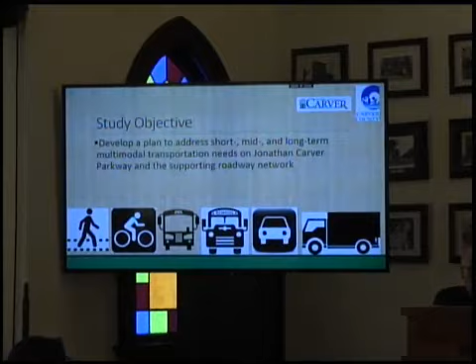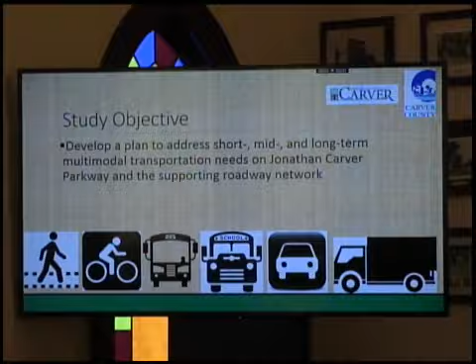As a reminder, our overall objective of the corridor study was to develop a plan that really looked at the short and long-term needs along the corridor. The idea was to look at things from a multimodal perspective. So we weren't just looking at things for the single vehicle car user, right?

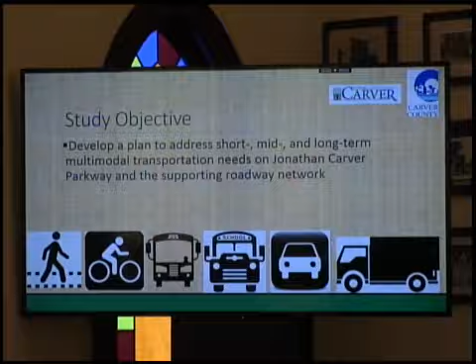There's trucks on this corridor. We have a very active gravel mining operation that's probably not going away in the next 20 years. We have a new elementary school, so we have school buses, and a lot of students walking, or being encouraged to walk and bike to school. So we have a lot of different users on the corridor, and the idea was to make sure the study took all of those users into account.

So we had developed some initial goals for the study, really to make sure that we are providing efficient and reliable travel, that we are safely accommodating all the different users, building upon the existing non-motorized transportation network. We'll get into that when we talk about the concepts, but there are some good elements in terms of pedestrian and bicycle facilities out there today, though there are some gaps, some of them by that school area, and we want to build on that and make it stronger.

We also want to provide infrastructure improvements that are compatible with the elements around the corridor, making sure we are sensitive to the different contexts along the corridor, and then do the improvements we identify in a financially responsible manner, so you're not redoing things. Let's look at the bigger picture, and if it makes sense to preserve some right-of-way today for something we need 20 years out, that's probably a better investment than waiting 20 years and impacting a building or somebody's home. So that's the framework in terms of the goals we devised.

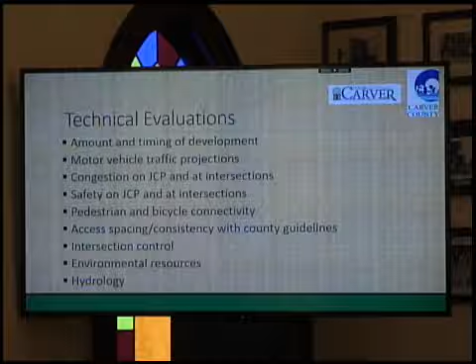So we did a number of technical evaluations. We looked at the amount and timing of development. We looked at traffic projections in terms of how many users are likely to be on the corridor. We looked at congestion on Jonathan Carver Parkway and at key intersections along the corridor. Same thing for safety—there are a couple of areas where we have some crash problems today. We want to make sure we address those and aren't causing problems for the future.

Again, that's the pedestrian and bicycle connectivity I talked about before. Looking at access on the corridor as development occurs and keeping that consistent, or making that work as best we can with some of the guidelines out there from the county, and even with MnDOT in terms of our connection to their system. Looking at different types of intersection control.

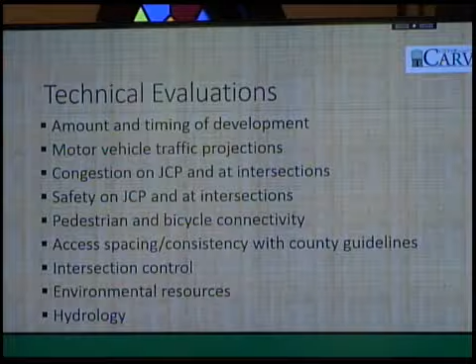So we looked at whether to keep things as side street stop, as some are today, where only the intersecting roadways have to stop. Does it make sense to consider roundabouts or traffic signals? We looked at a bunch of different options at those key intersections along the corridor.

We also identified environmental resources along the corridor in terms of wetlands and threatened and endangered species in the area, and then we looked at hydrology as well in terms of how we do drainage along the corridor.

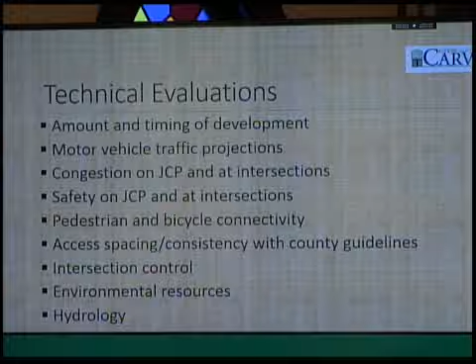This happens on a lot of roadways. Many were put in before we had current drainage rules, so you get ponding issues, or sometimes flooding issues on different corridors. So we're trying to make sure that when the county or city makes improvements, we're addressing all of those water resource needs as well.

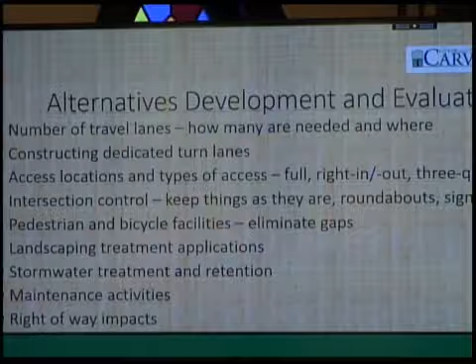So those were the base technical analyses to figure out the existing and current problems we anticipate on the corridor. Then we went through and developed a number of alternatives and evaluated those alternatives.

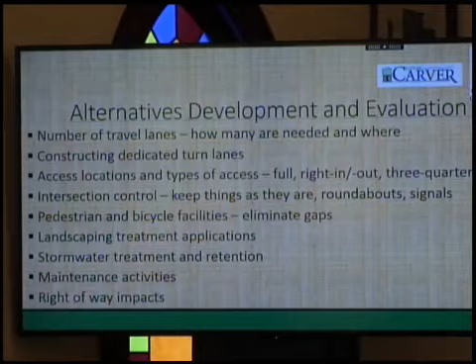We looked at how many travel lanes are needed on the corridor, and where those are needed - is it for the whole corridor, or just a portion of it?

We looked at constructing dedicated turn lanes. At some intersections you don't have a left or right turn lane approaching, and that can lead to safety problems. It can also make drivers uncomfortable when you see that car in your rearview mirror coming at you, and you want to turn left and have nowhere else to go. So those are the types of things we looked at in terms of the intersections.

We looked at some of the different types of access locations - do we keep them full, do they become right-in/right-out, or three-quarter, again for some of that safety and mobility. We also talked about roundabouts, side street stops, and traffic signals, eliminating gaps in that network.

We looked at some potential landscape treatment and applications, and we'll have information on that at the open house, along with some stormwater treatment and where we might need some potential ponding. We've also talked about some maintenance activities along the corridor.

As we get to the southern end, when you make that turn to go towards Jordan, there are some trees in that area that make seeing that intersection a little bit difficult, so potentially going out and doing some tree clearing and other activities.

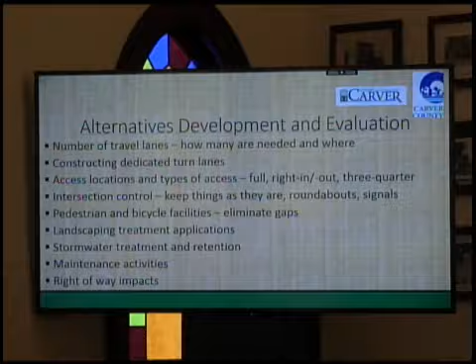And then we looked at some of the right-of-way impacts for some of the alternatives. In terms of right-of-way, it was again about preserving that long-term corridor, as well as looking at some of those intersections.

You can probably build a roundabout for any intersection, but your roundabout can get pretty big - you could get 2 or 3 lanes, and that's probably not good for most drivers, and it's going to have a pretty big impact on property. So that's when you start looking at traffic signals again.

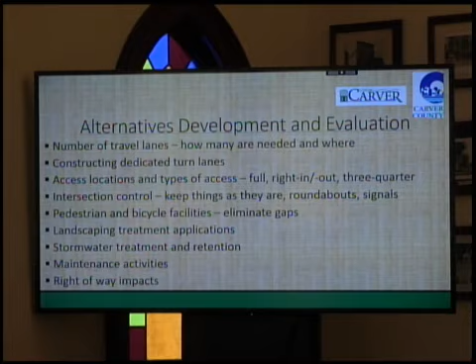So those are some of the things we went through in the process. We had gone out previously and asked folks through different engagement processes to help us identify what the problems were or things they'd like to see on the corridor in terms of improving it.

So we've had some open house meetings, we had focus group meetings, and we've had meetings with different resource agencies, like the county's watershed folks, understanding any concerns from those types of agencies. We've done a couple little newsletters.

We've got a project website. We've sat in on development review meetings. Since we've started this study, there's been a number of developments that have come forward along the corridor.

And so we've sat in with the development folks talking about where we think the corridor is going to end up, so that we're preserving the right-of-way before development happens, and we're not going back to people after the fact about where that's going to occur. And then we've given some updates to City Council, the County Board, as well as the Township Board.

So we do have some upcoming stakeholder involvement. I'm here tonight along with Dan, just giving you guys an update of where we're at. Dan's been working with the County Board making sure they're up to date on items. We're doing some website updates.

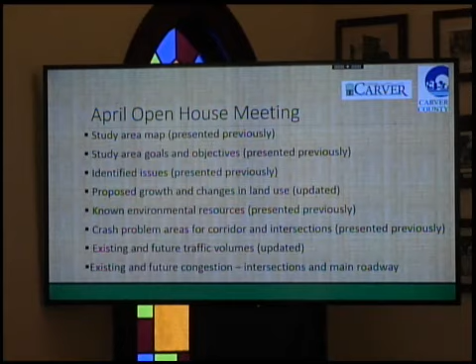We'll have updated information regarding existing and future traffic volumes. For those who have listened to my updates, you knew we were on hold while waiting for better traffic information, and we have that now. We'll also show those areas where we're going to see congestion continuing in the future.

We will have an ultimate corridor concept showing roadways, intersections, and trail improvements, plus a typical section so people can see how many travel lanes there are and where trail locations would be, giving a sense of how the corridor could look and function. We'll have a general landscaping concept that builds on the concepts done on Levi Griffin, tying in river rock ideas and low vegetation along the corridor. Then, costs, implementation phasing, and next steps of the process.

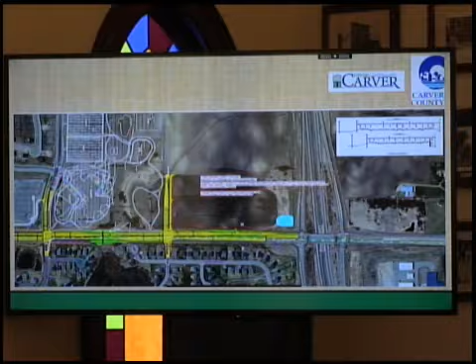So I'm going to walk through where we are at the northern end of the corridor, and I think you have the concepts in front of you. Just trying to think of the best way to go through this.

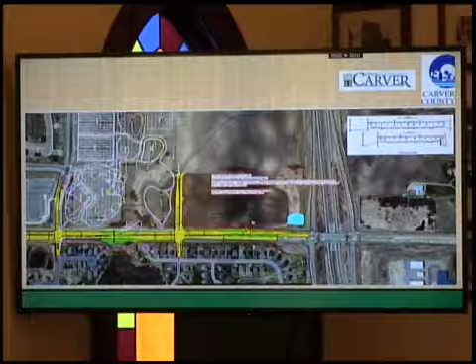I'm going to start at the northern end, near the intersection, the interchange with Highway 212. On the screen, it's the piece that looks like a diamond piece that doesn't have a lot of coloring on it.

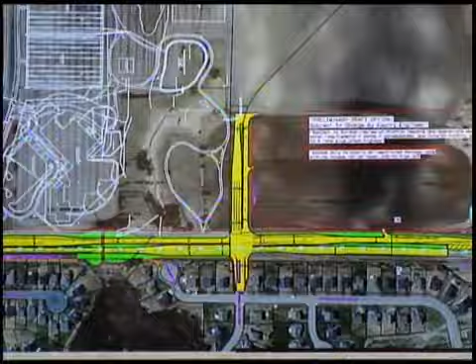One of the things we think we're going to need to do is restripe the bridge as we go further north towards the intersection with Levi Griffin Road, to allow for a full 4-lane roadway on that side as you're approaching the intersection. It's on the east side, so as you're going northbound.

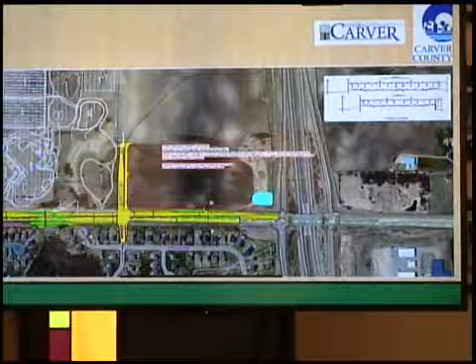Right now there are 2 left turn lanes that go into Levi Griffin Road. For this first project, highlighted in yellow, we'd recommend restriping that to a single left turn lane and allowing through travel lanes to get through the intersection. We think traffic volumes are such that we'll need an additional travel lane to get through the intersection. This doesn't change any building out there, it just changes the striping.

As we go further south, once you're on the south side of Highway 212 making our way down, we'd recommend a 4-lane divided roadway for the corridor all the way down to 4th Street, with 2 lanes of travel in each direction. However, we would be preserving enough right-of-way to eventually have 6 lanes in that area through Ironwood.

So we're preserving enough space so that if traffic volumes grow at a higher rate, where we're really seeing future congestion problems is that northern piece between Ironwood and the interchange with Highway 212. We would have a pedestrian and bicycle facility along the west side of the corridor in the southbound direction, and we'd also have trail facilities south of Springwood on the east side as well.

Part of the reason for only having a trail at this point on one side is that there's a limited amount of space. If we need to put in 6 lanes in the future, having a trail on that side gets a little complicated because there's quite a bit of topography from the roadway down into the neighborhood. So in order to fit everything in, we have to get a little careful with our space.

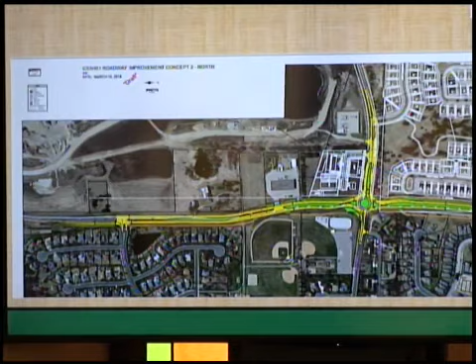As we move further to the south, as we get towards White Pine Way, we are recommending a right-in, right-out at that intersection. It currently does have full access, but again we're recommending that 4-lane divided roadway. So traffic going southbound would be able to take a right into the development and/or have a right out of it. Their other option would be to go down to Dahlgren in order to make that left-hand turn out of the development, or else go towards the north to the Ironwood connection.

So the people off White Pine Way will only be able to take a right out and a right in coming from the south. The folks on either side of White Pine Way get it on both sides of the corridor in that area, and they do have other connections to other intersections on the corridor, so they both can access other spots if they want to make a left-hand turn.

As we move further to the south, the trail's on both sides of the corridor here. As we get to Dahlgren, we are recommending a roundabout at this location. We think it will help with some of the speeds on the corridor, and it's our transition from the busier end of the corridor to the quieter end. We think it will be especially helpful for truck movements coming in and out of the area, and for them to be able to get on and off the corridor.

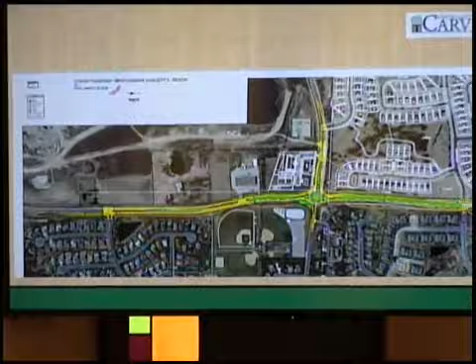I'm a bit confused about the colors on the sheet. So I guess it's the peach brown colored ones? Yep, and there's a peachy orange, and then there's a darker brown. And the darker brown would be the new segments, or ones that have to be reconstructed.

Okay, because south of 4th Street, there's a trail there already? Portions of it, not south I don't think, sorry, I can't see from here. So south of 4th Street, since we widened that intersection a little bit, it might have to be reconstructed. So okay, south of it. Yeah, okay, so that's where maybe there's a distinction.

That's where the scoreboard is and things like that. We're not sure right now if there's an issue with home run balls leaving the field and hitting the street, but this is something we've noted. We haven't worked out all the stormwater design needs in this area. That's something we're working on with your staff as well as our corridor team, but more detail needs to be done with that through the design phases.

It's potentially possible that this portion of the project would have to run a stormwater system all the way down to the pond closer towards Main Street. There's a small pond down there, but we may have to do some facilities along here all the way down to there just for this portion of the project, for example.

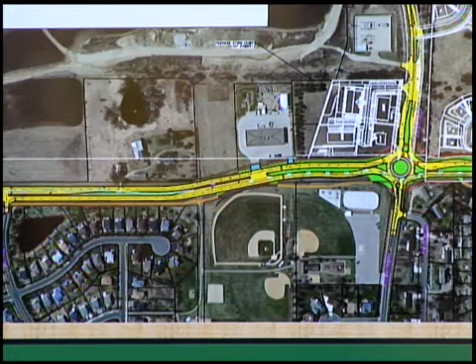That's just something normally we would do as part of a project. Sometimes those are more local costs and things like that, but it's something we have shown the extent of, all the way to that new access serving the Olson property there, the Oak Tree plat. You can see how far back that goes.

Jack, if you wouldn't mind just switching to the next slide, the first slide. I just want to also note one more thing there.

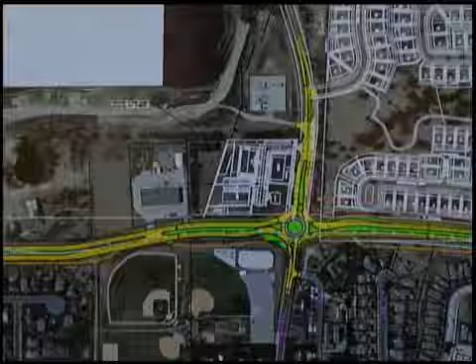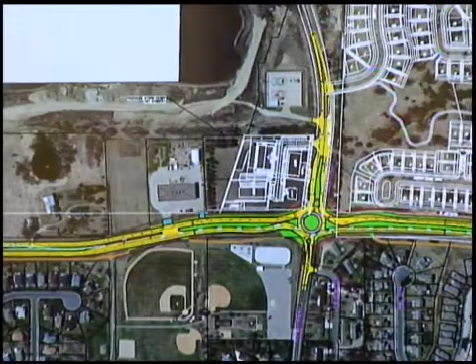So if the median is, if we're going to the quieter end of the corridor, south of the roundabout then, we still have a pretty wide median there. Is it something we could remove in order to have more space? By the roundabout, you would not, because you want to channel the traffic feeding into the roundabout appropriately.

It just seems like a long way to funnel it that far, because I've certainly done other ones that don't seem that long. South of the fire station, we could. I think the recommendation from the design team, the specific design engineers, was to maybe finish this off completed out with the curb and gutter to the full extent it ever would be widened, and be done with it. That's the approach in this case, but certainly it could be transitioned sooner.

We're also just providing a better left turn lane in and out at 4th Street, so there's more space for people to turn out of there or into it. But again, that's something that can be discussed further. I'm not saying maybe even removing the whole thing, because it looks like we've got pieces where it gets smaller and wider. So if we're running out of space, speaking just between the ball field and the fire station, if there are ways we can minimize that as well.

Sure, makes sense. One other thing we want to note, Jack alluded to at the development review meetings, we were successful, even though the study's taken longer, to work with the Oak Tree plat to reserve the right-of-way as part of your review with the Plan Commission and the Common Council. So that right-of-way should be free and clear. We did superimpose this design on that plat and did, as the county, get the right-of-way from that plat at that time. So we don't expect too much major impact in terms of right-of-way for that plat.

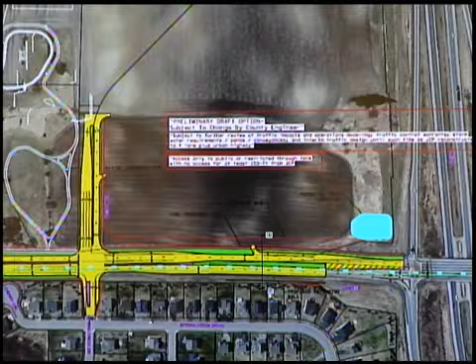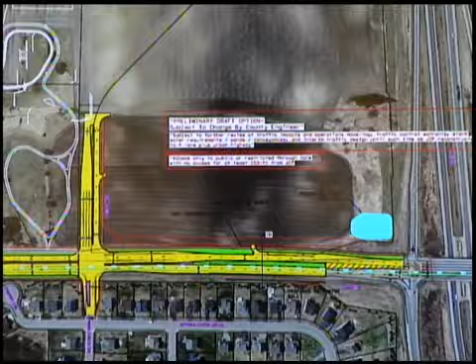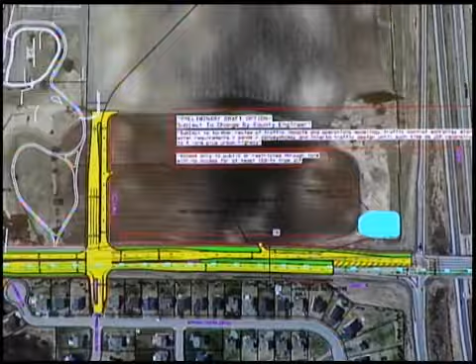I have a couple questions. Does the design include any burying of existing power lines? And if not, can that be looked at? Could it be negotiable? It can be. One of the things we are doing right now, and was happening this last fall and is going to occur this spring, is working with Minnesota Valley Electric. As part of the Oak Tree plat, we did lower the grade of the roadway and are relocating the utilities along there. That's something that has to be discussed directly with them in terms of the burying of that. I know they have been talked to about that, so I just don't know their specific plans in this case.

For the most part, they are burying most of them, and there's just some details. Sorry, I mean existing, not anything new. Any of the existing power lines, would those be buried? There is quite a significant one from Xcel. I'm not sure if I should call it a transmitter. But when you alluded to the baseball diamond, there's that backstop right there. Councilmember Sayers is talking about the transmission line. All the transmission lines, okay.

That one we'd have to have a special utility meeting with them, which we certainly can, to kind of figure that out and look at the different cost options. They would look at that and see what they could do in those cases, but we can actually try to reach out to them as part of the corridor meeting potentially. Normally it's done in the design phase, but it's something we try to get ahead of as much as possible. They have been positive to work with on these other relocations and things like that. It would be nice to see if it's an option while we're in the design phase. I think what I'll do is recommend a meeting with your city staff and city engineer and get something in advance, maybe in the next few months, so when they're doing their summer construction season, we can work with them and they can plan ahead if they are doing some other system upgrades. So that's a good comment.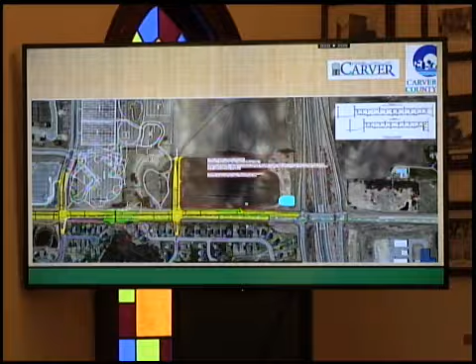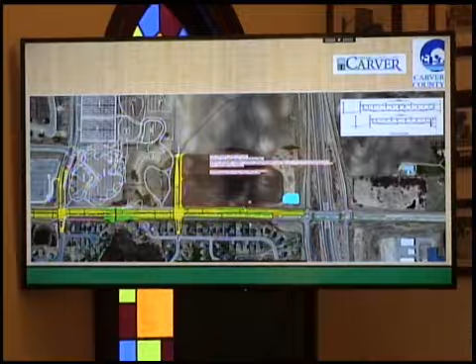Was there any thought of continuing that to make it 3 lanes effectively up the hill? So the idea is that we'd have essentially 2 northbound lanes from where they enter from the gravel mining area. Right now it drops as you get closer up to 6th Street, and so we're making it continuous so those 2 travel lanes continue all the way up the hill. In terms of adding another lane at this point in time, the traffic doesn't really warrant it. By getting rid of that drop where there's the gap today, we're getting rid of the racing issue - because that's the problem today, it drops down to 1 lane instead of 2, and people try to maneuver. We're providing that consistent 2-lane all the way from the gravel mining area in the northbound direction, so it gets rid of the jockeying that occurs today. We think that should take care of a lot of the problems we're having right now.

While you have this up, Jack and Dan - Dan Lannis is going to connect with you on it - but the council reviewed the United Properties concept at their last meeting, and they'd really like to see a right-in, right-out off of 11 on Jonathan Carver Parkway, just for emergency access and flow of the site to take pressure off of Monroe Drive. The county was okay with the right-in, but there are some issues related to transition for that right-out - that's something the city is going to ask the county to take a look at. It's better for me to ask it with them here so they can put pressure on you to make that happen.

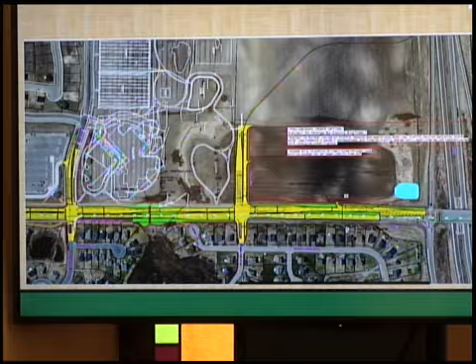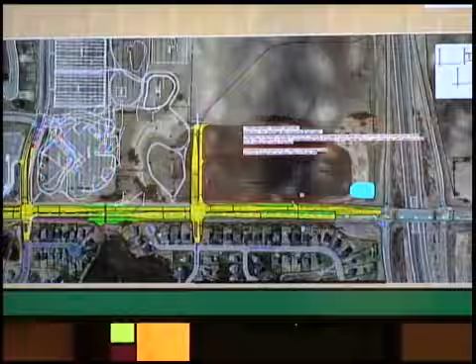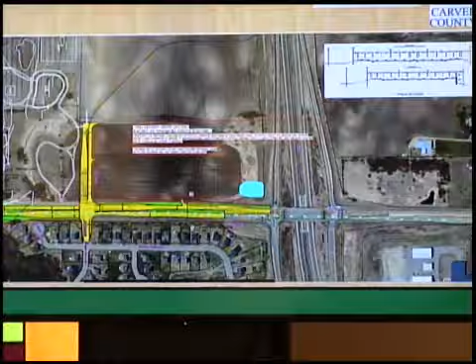Is there thoughts about putting 2 turn lanes onto 212 at the north end? We did look at that, and under some traffic operation scenarios in the future, depending upon the volume, there may need to be in the northbound direction a second right turn lane so you'd have 2 turns onto 212. We don't think that's needed in the immediate 10 to 20 years, but if traffic volumes do increase, we did look at some options that would provide that.

Okay, then down to Spring Creek - with the right turn lane from Spring Creek onto JCP, I'm assuming that's going to require a right-of-way acquisition from that homeowner. Yes. I love the idea - same thing on Ironwood too, there's probably some right-of-way acquisition on that side as well, on the north side of the corridor.

That was - I love the tunnel. What else was there?

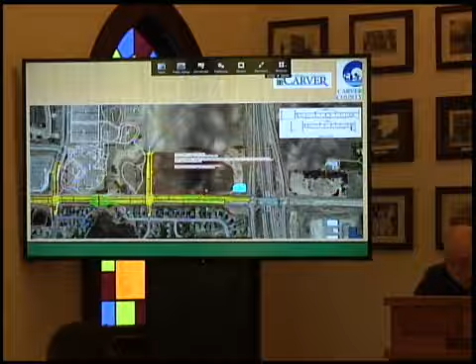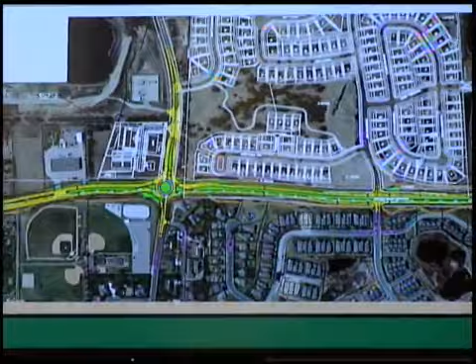The intersection at White Pine Way - I know there'll probably be some people that'll raise some hackles about not being able to access it coming south. They'll either end up taking Ironwood, or they'll come down and take the roundabout - whatever you want to call it, the circle, the rotary - and then they'll just get dizzy in the circle and go up. I think I know your position on roundabouts. I am not a huge advocate of roundabouts, but this seems to work. My only concern is that intersection - will there be enough right-of-way to make that work? We believe there is, yes.

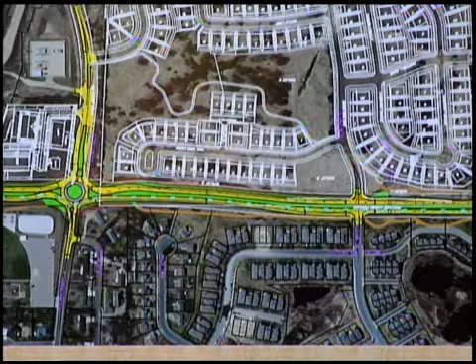Okay, what is the speed limit going to be on the corridor? I don't know that the speed limit will change - there will have to be a speed study after the fact. That's how we have to design, in conjunction with what the existing design speed of the roadway is. In this area, I do believe it is 50 miles per hour.

So regarding White Pine Way, I won't profess to speak for all residents in that area. One of our focus group meetings was with the neighborhood associations, and a gentleman who lives in White Pine was there and was a strong advocate for a right-in, right-out. His wife and daughter had either gotten into an accident or had a near miss at that location, and his thought was that going to a signalized intersection, north or south of that area, might be a better option. But I don't speak for all residents, because I'm equally certain there are people who won't be happy without a left out.

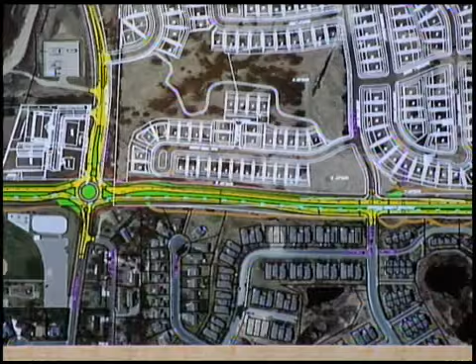So we're talking about speeds, and this would be pure speculation. But if we're adding roundabouts and signals, that would most likely slow traffic on this road, because you won't have the long runs to get going 50 miles an hour for extended periods of time. Generally speaking, as things urbanize, speeds do drop. Carver County will be in charge of the traffic signals, and they'll probably still give more green time to the through traffic, keeping the movement going for the heaviest traffic volume, especially during peak hours. So yes, there will be some slowing, but is it going to be dramatic, with people driving 5 to 20 miles per hour slower? Probably not.

There will be a considerable amount of traffic moving north through the Oak Tree development, up through the Carver Crossing area on the west. That's because most people won't want to come out, go down, get dizzy in the circle, and then turn back north. Just food for thought.

So Glenn, that's one of the things we talked about—we'll probably come to the council with some improvements to Ironwood, noting that there will be more traffic on that section of Ironwood from Hartwell going east to 212, or 211, excuse me.

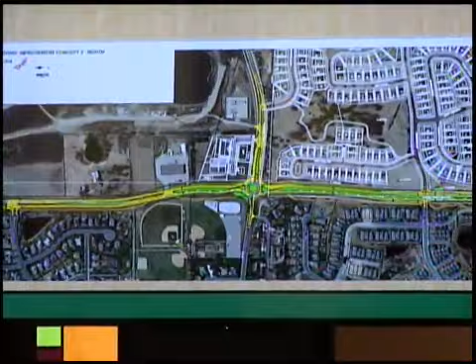At the intersection of the ball fields and the fire station, public utilities building, is there going to be lots of signage for fire station ahead or whatever? Because in case of an emergency, when they're pulling out, they'll have to cross three lanes of traffic if they're going north. That's a concern at that intersection. Yep, and there are some different tools—when it goes into the design stage, you can do things like flashing signs to alert drivers of emergency vehicles. There are different techniques beyond regular signage that give motorists a heads up if there's an incident or emergency responders need to get out.

And then at that intersection, is that going to be just a right-in to the public utilities, or will there be a turn lane for people going in? From the northbound direction, yes—there'll be a left turn in. But when you're coming southbound, that's actually still an open question, something we'll have to figure out in the more detailed design phases.

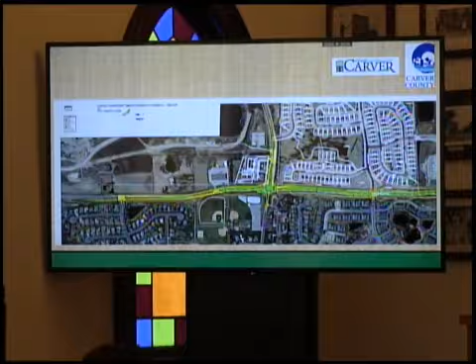You good, Glenn? Still working it.

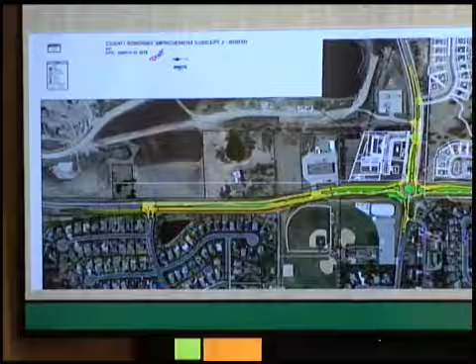You said there were two properties with different lot sizes on the southeast side of 4th Street, correct? Yes, sir. Is there going to be a barrier on the south of that, or will it just be striped? That's striped, or it's shown as striped right now.

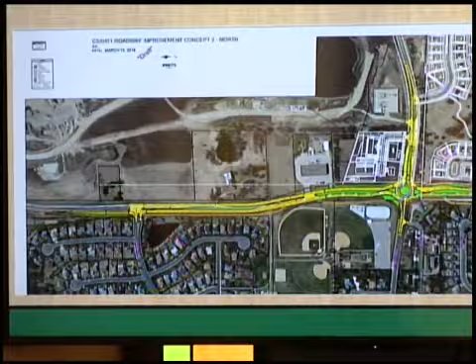You said potentially in the future, though I know it isn't part of this project, there could be a roundabout at the bottom of the hill, south of the creek, at the intersection where County Road 40 and 11 come together—out further to the south, near Summer Gate or whatever that development is called. Yeah.

One of the things there was the county did do an intersection study of that intersection a few years back, and it had different alternatives in it. We kind of took it from there into this study and analyzed it. One of our recommendations is to do some minor left turn intersection improvements there, and then potentially wait until development occurs or other needs arise where traffic grows to a point where we need to do more at the intersection.

So, but I was thinking at the intersection at the base of the hill where Old 40 comes in, and the gravel pit comes out. Is there going to be any type of thoughts about that in the future as well?

Right now, we don't have any recommended changes in that area. If traffic volumes get bigger, we would consider widening to 4 lanes. We would look at dedicated turn lanes into and out of the gravel mining area so that it was safer to make some of those turns than it is today.

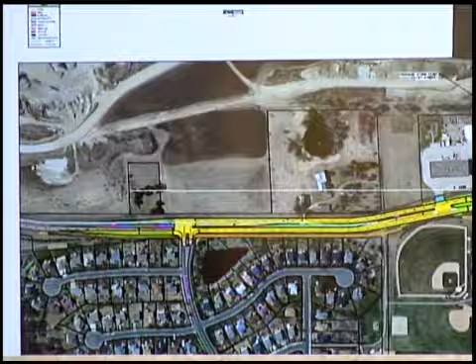Moving further south, the next intersection would be the Bluffs. Again, we would be looking at dedicated turn lanes into those neighborhoods. If traffic volumes get higher, going to the 4 lane all the way down to 40. But in the interim, we would be putting in left and right turn lanes if needed, or a center turn lane through a portion of that.

All right, thank you. That's all I got.

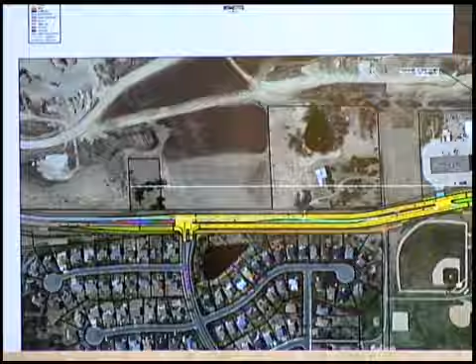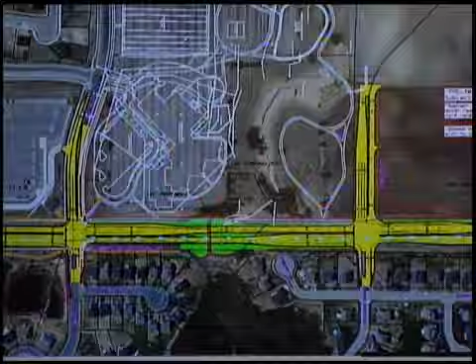Good. Jack, can you just talk us through beyond the open house next steps? Yes, I will go through this quickly. I apologize, we went slow through the other things, that's my fault. So within the next 5 years, what we would be looking at is widening Jonathan Carver Parkway to 2 through lanes in each direction.

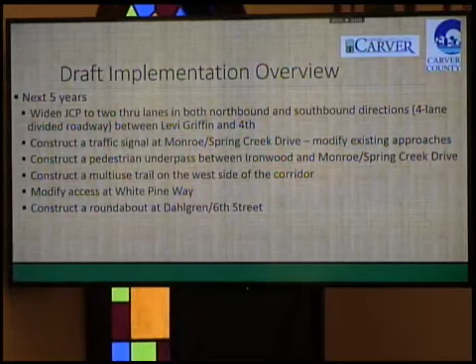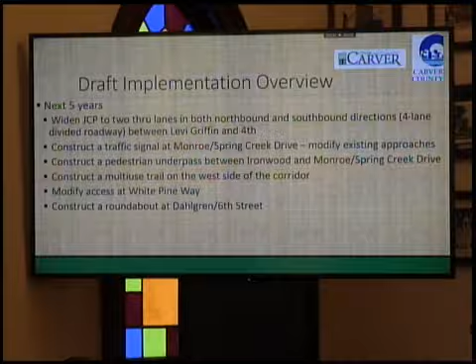Constructing a traffic signal at Monroe and Spring Creek Drive, constructing a pedestrian underpass, constructing the multi-use trail on the west side of the corridor where there's currently none at the northern end of the corridor, modify the access at White Pine Way, and then construct that roundabout at Dahlgren and 6th Street.

The county does have in its plan a mill and overlay of the corridor south of 4th Street, so that's just kind of improving the surface level of that.

Installing that turn lane and bypass lane at the County Road Highway 40 intersection, potentially with some tree clearing in that area. There's a safety problem at that intersection. It's not an operation or a mobility issue, there are some safety concerns, and we think doing the tree clearing and putting in the dedicated turn lanes would be the first step in terms of addressing that problem.

The county has gotten some funding through the state and federal governments to do some different types of striping along the corridor, so that would definitely be done as part of that mill and overlay project.

There are plans to expand Trunk Highway 212 west of the city of Carver to Cologne to 4 lanes, so that would be occurring kind of in that next 5-year time frame, along with making some improvements at County Road 43. And then as development continues, trying to develop the city east-west collector routes just south of Highway 212 and north of Highway 212 as development occurs.

One second, what's an R-cut intersection? So that is an intersection, and I apologize, I don't have a picture here with me.

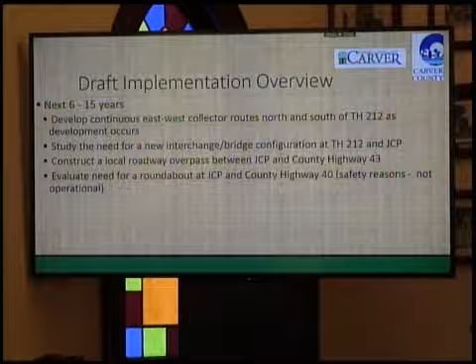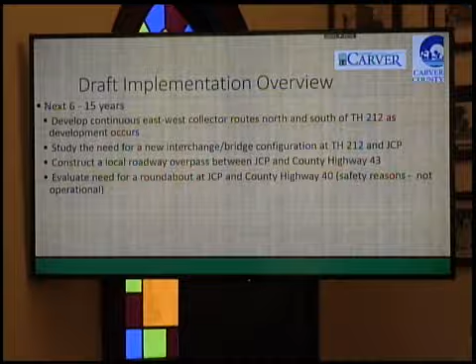In the next 6 to 15 years, again, continuing to develop those east-west collector routes, studying that need for that new interchange as I had talked about. Consider constructing a local overpass of Highway 212 between Jonathan Carver Parkway and County Highway 43. That would serve local traffic—you wouldn't be able to access Highway 212, but you could get to the north and south sides of the city. And then look at a need for the roundabout at Jonathan Carver Parkway and County Highway 40 if safety reasons or if there's continued safety problems occur.

In terms of operations, we think that the roundabout is needed in about 20 years from now in terms of traffic flow.

20 plus years or growth, potentially, depending upon what that study says, construct a new interchange at Highway 212 and Jonathan Carver Parkway, make additional improvements at that Levi Griffin Road and County Highway 61 intersection. At that point, there would need to be some better lane configuration on Highway 61 at that location.

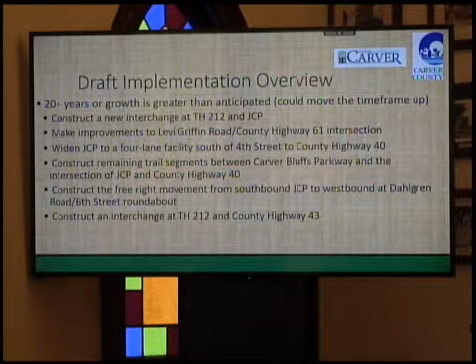Potentially, again, 20 plus years out, we'd widen Jonathan Carver to a 4-lane facility south of 4th Street, then construct any remaining trail segments to the south, and potentially construct an interchange at Highway 212 and County Highway 43.

Our open house for near-term activities is on April 11th. We'll take feedback as we heard tonight, hear from the residents as well, and modify things as needed. We'll prepare a draft and final report, hoping to have that back to folks later this spring, sometime around May.

We've got a draft we're preparing for the city and county right now, then we'll transition to potential design activities for the northern portion of the corridor and plan for projected costs. At this corridor level, without detailed design yet, we still need a lot of surveying and additional information. As a placeholder for construction, right-of-way acquisition, and all the design work, we're estimating somewhere between $15 and $17 million.

Is that county, state, local? That's the total cost. The different cost sharing is something we have to work forward with you on and get down on paper so we can respectively plan in our CIP budgets.

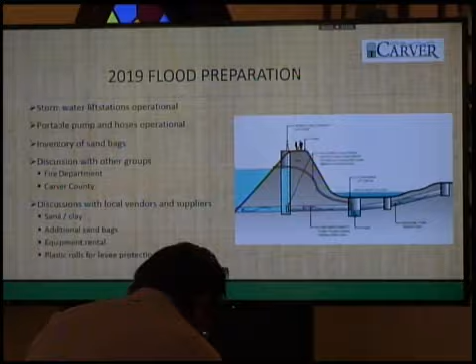Thank you. Just wanted to take an opportunity here to update everybody what's going on. Obviously, the flooding's been in the news and on everybody's mind. So really just letting everybody know what we're doing to prepare for it at this point in time.

Right now Public Services staff is working on getting all of our stormwater lift stations ready. We talked about those last summer. The stormwater lift stations are used once we start closing the gate as the river rises. The stormwater and snow will continue to melt, and as it hits where we close the gate on the levee, this pumps that water up and over the levee back into the river.

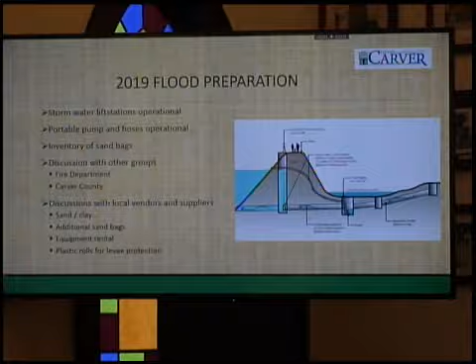We have 3 of those still working at this point with the 2018 stormwater project. We'll be down to 2 next year, but right now we still have 3. Getting ready for the high water, we shoveled them all out, got them up and running, and made sure all the force mains are clean and operating. We've got those all started and tested.

We also have a lot of portable pumps. With some of the original projections of what we're looking at for floodwaters, all of our portable pumps are in the shop, getting them up and running and making sure they're ready to roll. All the hoses are good to go, so we're preparing for that.

Staff also went through and got all of our sandbags. We've got probably 1,000 sandbags on hand ourselves, plus we have an inventory stored with the county. We rechecked with everybody and made sure all that stuff's there. You'll probably see some sandbagging — we'll start making some here early, at the end of this week.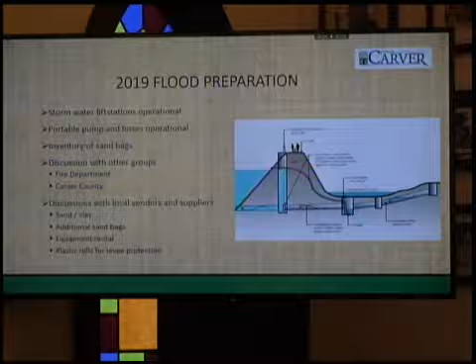We did start a discussion with other groups. The fire department met with them on what we're looking at and what we'd need for help as we go along this path with some of the flooding. Carver County did hold a meeting last Friday and started the EOC, the Emergency Operations Center, so that's in full effect right now. So anything we do with flood-related stuff runs through them, and that's gearing up and planning in the event there's some FEMA reimbursements and stuff that happen in those areas. They want to track road closures, people needing sandbags, and how some of those are going. So we walked through some of that stuff.

Some of the other things we're preparing for: we've got to start closing some of our roads. We're working with our local vendors if we have to do anything with our levees, if we have to raise them, if we have to close streets. So we're working with them, working with the county on additional sandbags, and then plastic — that's a big one, getting heavy mill plastic to cover our temporary levees and stuff. We're working on all those pieces and parts.

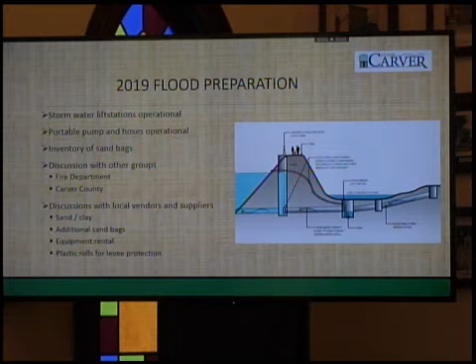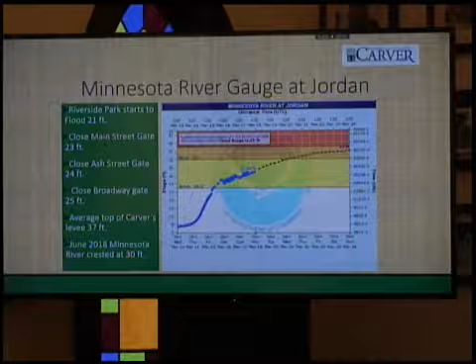The other thing we do during all this is really watch the National Weather Service. This was taken this morning, and as you can see, as of Wednesday we were down around the Jordan gauge at 9, and right now we're at 21.4. Actually just before we got here I checked it again, and we're at about 22.4 now, so it raised another foot from 7 o'clock to 4 — it's updated twice a day. As you can see here, we're looking at it cresting Sunday at 27. The new projections are 29 on Sunday as well.

As you can see on the screen, in June of last year we had that rain event where we ended up having to do some temporary work on Main Street Bridge. We reached 30 feet at that time, and it didn't reach our temporary levees we put in place. So that gives you a gauge of how that looked last year. The top of our levees are all pretty much at an average of 37 feet across, to put that in perspective.

Riverside Park is closed now — the water's already up into the parking lot and will be into the road yet this evening, so we did close that. The gate on Main Street, down by the trestle, is closed — we closed that this morning, so that lift station is pumping all the stormwater. Ash Street will be our next one, potentially later tomorrow, and then we'll close Broadway as our last one.

So one of the other things we've been working on is the Jordan gauge. I gave you a larger handout because this is a little difficult to see, but we've been working with staff over the last few years, and Bolton and Menk, trying to survey some data. One of the things we ran into was really coming up with an action plan when it comes to our river. We always hear the Jordan gauge is at 9 feet or 10 feet, but what does that really mean? So we worked with Bolton and Menk and were able to come up with an elevation component to this.

So as you look at a set of plans, you can see that elevation, and it actually means something. We also correlated that with what infrastructure might be affected by those numbers, and some of the staff action plans you're seeing there. This is a working document, and we're continuing to update it and add pieces to help everybody understand what's going on. It also gives the ability for anybody to grab that, know what's going on, and shut the gates at the appropriate time to make sure things are in place.

So you can see at 21, the Jordan gauge is in the yellow. It's 706 in elevation, and water's approaching the parking lot in Riverside Park, which is the point in time we close the park. So all those things correlate with what we're seeing on the gauge. It's taken some time because of the formulas Bolton Menk had to put into this, because based on the flooding elevations, the amount it raises changes. So every so often they had to make some adjustments to that, so it actually correlates to what we're seeing here, since we lost our gauge a number of years ago.

With that, I'm willing to answer any questions if you have any.

What year was it that we added to the levy? Was that 2013? 2011. 2011. And what was the level at that point? So 2010 it was 33, Jordan gauge of 33.

Yeah, for 2011, one of the impetuses for that was Governor Dayton came out to the scale facility in Jordan, is that where that is? And the National Weather Service kind of inferred that there was a decent chance we were going to exceed the 1965 flood levels, so that was the impetus to say let's raise the top of the levee by 3 feet.

Can I ask questions? Go ahead. Brian, in the last few times we've had to do this, we've asked for a lot of volunteer help, including levee watch and filling sandbags. Are you planning on asking for that help from the community again?

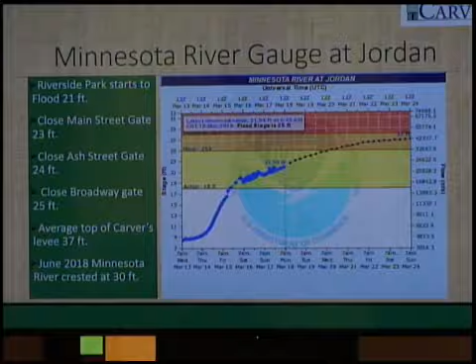One of the things we worked on with the fire department is the levee watch—there's a lot of criteria on how we watch it, and we're getting feedback from other people. We have to make sure we train them, and our goal right now is to have the fire department help us manage the levee watch, and then city staff will fill in for the rest. If it prolongs for a long period and we get tired, that's something we'll have to look at, but initially we're hoping to watch it internally to make sure we're watching all the right parts. Because we're really supposed to be walking the toes of the levee, which goes in and out of people's backyards, and with the wet conditions we just want to make sure we're putting the right people in the right situation so nobody gets injured.

Sure, how about filling the sandbags? Sandbags will definitely be a need, depending on the quantity we're going to need. A lot of times, and everything we've done in the past has been kind of in bulk, where we wrap the big levees with plastic, and then the sandbags—all we need is really for over the top of that.

So in the event that we do need help with that, we'll reach out to people. If you need help, in the past it has been kind of amazing to watch the city come together, and people are definitely willing to volunteer to help out with those sandbags. So don't feel that you have to do it all yourself. People would be happy to help.

No, it's a good point. And my other question then is, for the new lift station work we did down here, when they built that levee back up, because they had to dig into that, what's the integrity of the levee in that spot? Do we know? Was it packed down correctly? Do we have a weak spot there? I've heard some questions from residents downtown about that specific spot. Yeah, in those areas we did put the material back in there that was there, and it was compacted, and we did have a Bolton and Menk staff member on site watching when that went back in and compacted. So we assume everything's back in place and where it's at, and we haven't heard otherwise.

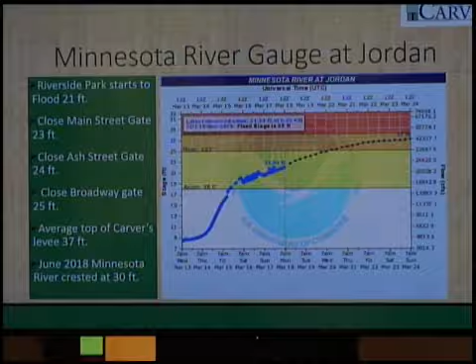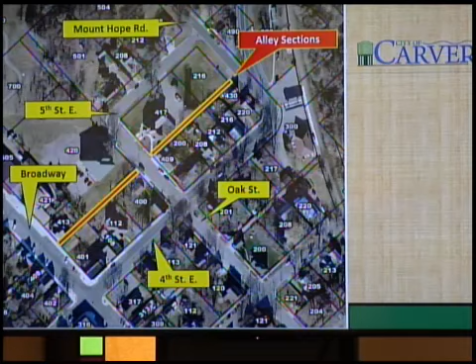Mr. Merrick: Thank you, Mayor and Council. So during your February work session, we discussed the elements that make up a right-of-way, and specifically boulevard maintenance, which we commonly refer to as the unpaved area within the right-of-way. Based on that conversation, a draft ordinance has been created which formally requires an abutting property owner to maintain the boulevard area immediately adjacent to their property. Practically, there hasn't been an issue with it. The city does have ordinance language related to shoveling a sidewalk in the right-of-way adjacent to your property. However, we don't have mowing of grass, which would be consistent with snow removal, so we've put together a draft ordinance with the help of the city attorney.

One of the pieces I wanted to mention is that the draft exempts maintenance requirements for county, state, and federal roads. We talked about that briefly during our work session. One of the things we were concerned about were the unintended consequences of establishing maintenance requirements in right-of-ways of other jurisdictions. They may or may not want residents to be within their right-of-way, and they may have different standards, so we didn't want to try to monitor those or be in conflict with their existing standards, so there's an exemption there. There's also an exemption that provides the Public Services Director with the ability to exempt an area if it's a wetland area or a significant steep slope.

That way we certainly don't want someone to put their safety in jeopardy by attempting to maintain a boulevard area. I would classify this as a language cleanup more than anything. We don't have a problem, I'm not expecting there to be a problem, but we did have a gap in our ordinance. So happy to answer any questions, and the city attorney is here as well, should you have any questions.

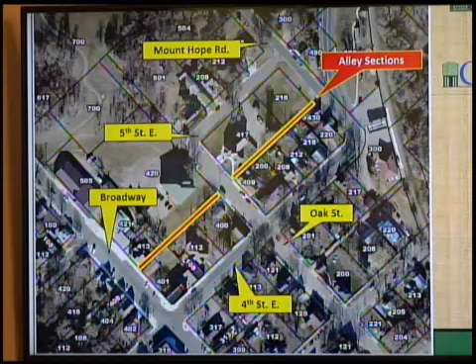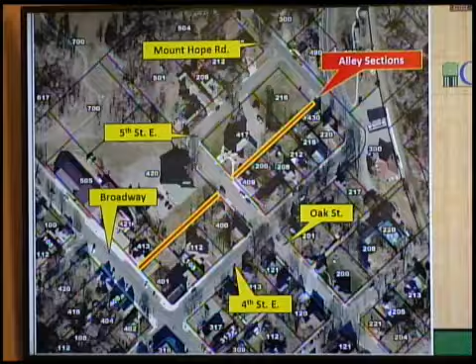So we had the grass, I believe it said 8 inches, that was the cutoff line for when we have to go out and do something about it. I believe the intent is that any additional improvements, like if you were to plant perennials, that's at your own discretion and they could be removed. So those are still allowed? We're a little bit silent on that, but correct. They can go in there, but if the city has to go in, they're responsible, unless someone plants an evergreen tree right on the corner and it interrupts sight triangles at that intersection.

The one thing we got some feedback on is that this doesn't address the city's maintenance protocol. There's been questions related to where the city cuts in boulevards and where they don't. This doesn't address that, that's a separate issue. But if the council or residents have questions as we get to the council meeting, we can address those pieces. This isn't an operations and maintenance policy for public services as it relates to maintaining grounds or areas within the city. I really like it.

I do too. Anyone else? I agree, I think it brings consistency.

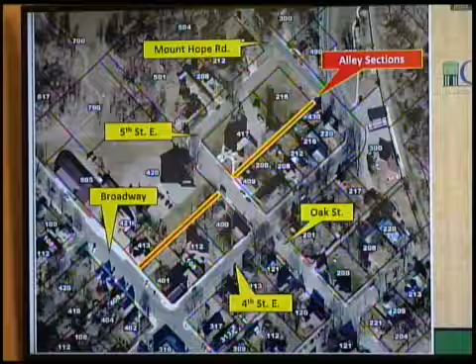Seven days a week? No, it'd still be the Tuesday through Friday or Wednesday through Saturday schedule.

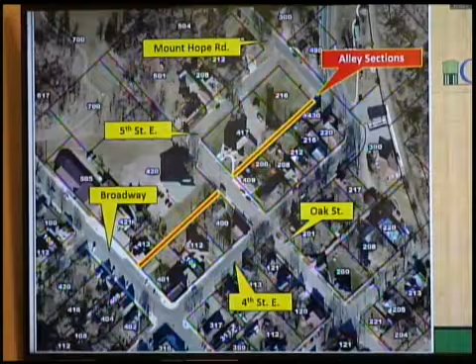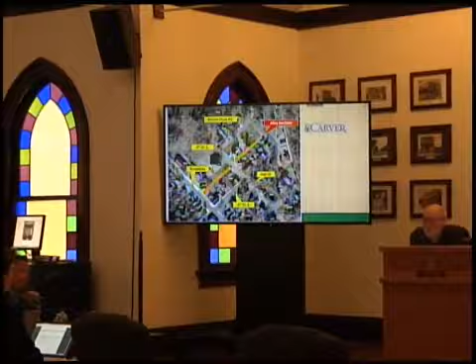If you wanted to pursue it, we could prepare a formal memo and have that considered at one of your next meetings. It would have to come out of the special capital project fund since we don't have $20,000 in another area, or you could choose to cut something from the 2019 budget. One thing to consider for the 2020 budget is that the city will likely have to fund that whole position.

The county won't just let us pay for .65 — they'll fund it through the end of 2019. But depending on where somebody else is in the county and the geography of that, there's probably a discussion the council will need to have regarding the 2020 budget. I did tell Sheriff Kamerud that I'd address this with the council as far as seeking whether you're interested in having a conversation about funding that for the balance of 2019.

I'm currently not interested. I think our coverage at night is great. We're not adding days by that. We contracted out for the .65 for this year. Obviously we'll have to take another look at it in 2020 as to how that either splits out with another community or we'll have to look at having a full-time night officer.

But we just plucked out money that we didn't budget for the transit, and now we'd be plucking out another. For me, as long as we're not losing any services—because they have to honor their contract with us this year, is that correct? Correct. I'm currently not interested in spending more money on additional service hours on the same days we're already having them, until we look at it for the 2020 budget.

I agree with that. It's a topic for discussion for the 2020 budget. But as of right now, we don't need to spend that. We can look at it though, absolutely.